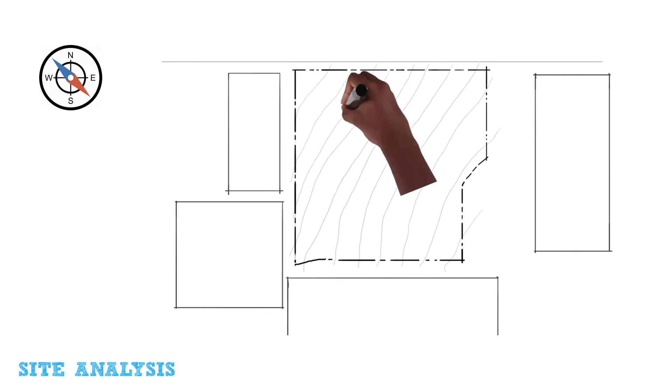Here are some important sustainable design strategies to consider when designing and constructing buildings. Do some site analysis. Gather context-specific information such as climatic data and other attributes of the site, such as the terrain, and design in response to them rather than against them.

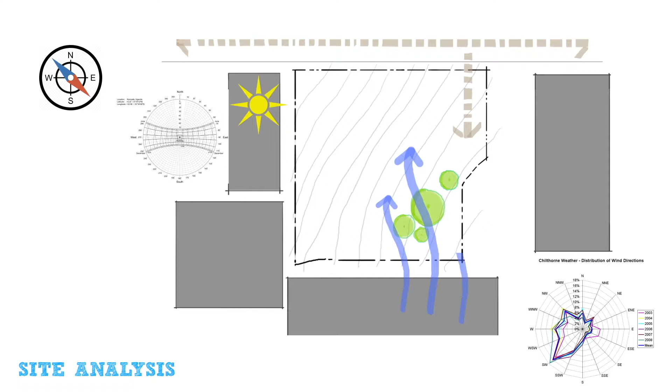Building less is always better. Retrofit old buildings and give preference to readapting greyfield and brownfield sites over undeveloped greenfields. This reduces demand on building materials and saves costs. The less the building footprint, the better. New buildings should not exceed 60% of the plot.

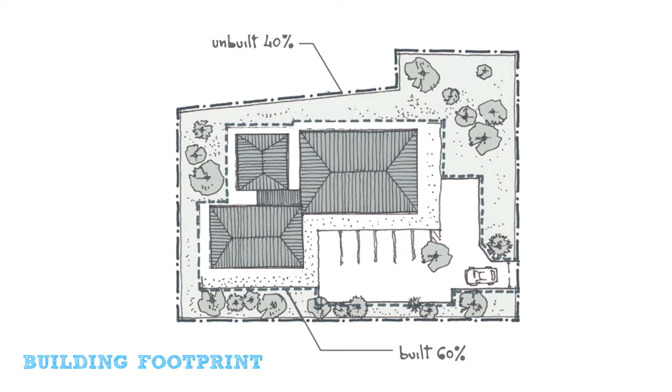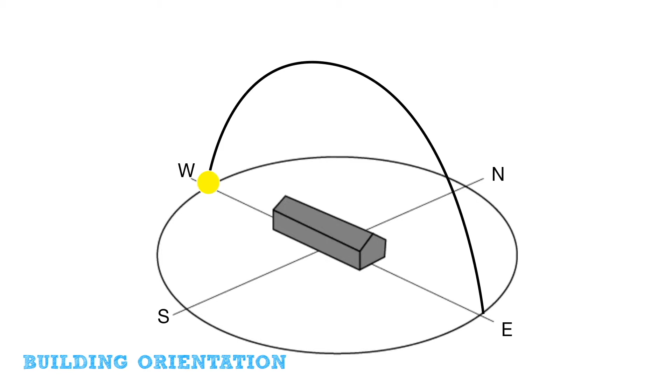Design buildings with the longer sides facing north or south. This minimizes exposure to direct solar radiation and heat gain from the sun, and saves energy that would otherwise be used to cool the building. Design buildings to be narrow in plan because they are easy to light and ventilate naturally, especially for hot and humid climates.

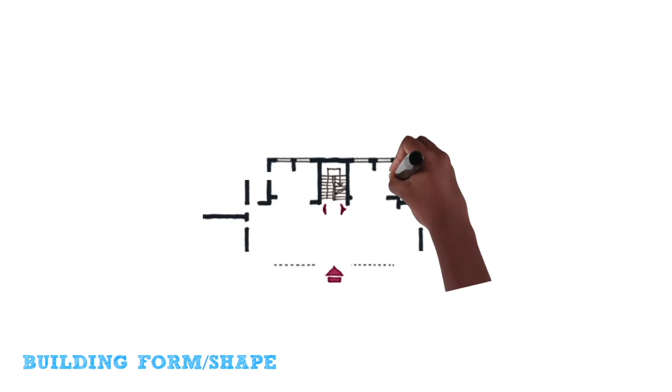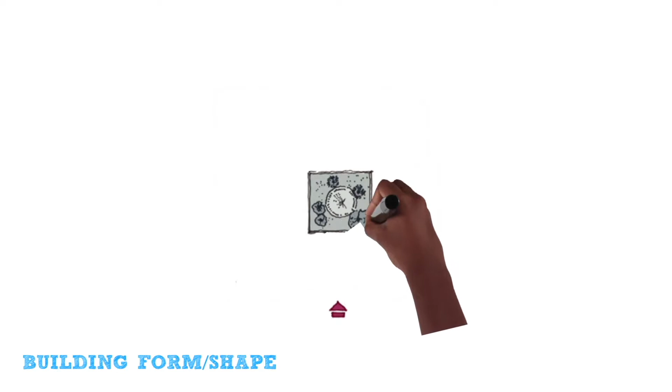For hot and arid climates, compact forms with internal courtyards are recommended to retain cool air in the building and minimize heat gain. Services such as toilets, staircases, lifts, and lobbies should be located on the east and west-facing facades to act as buffer zones and prevent heat gain.

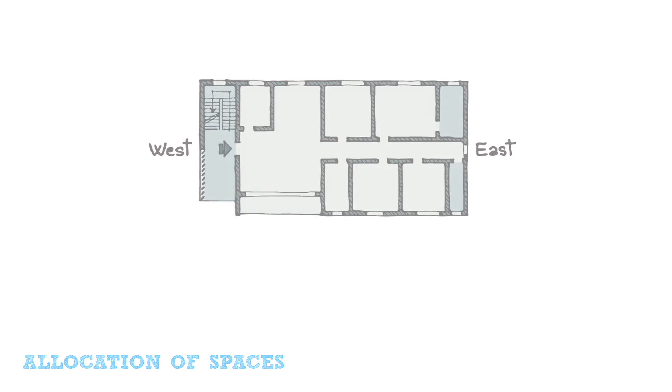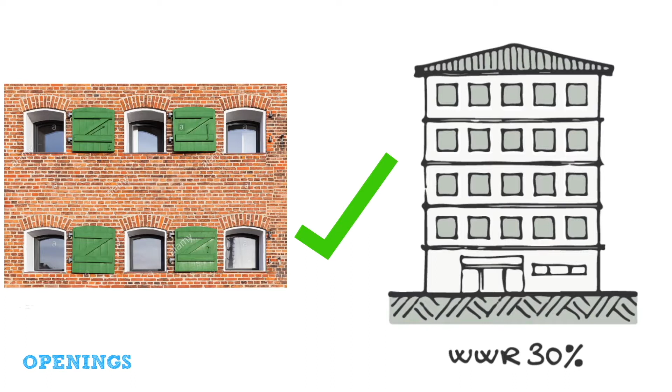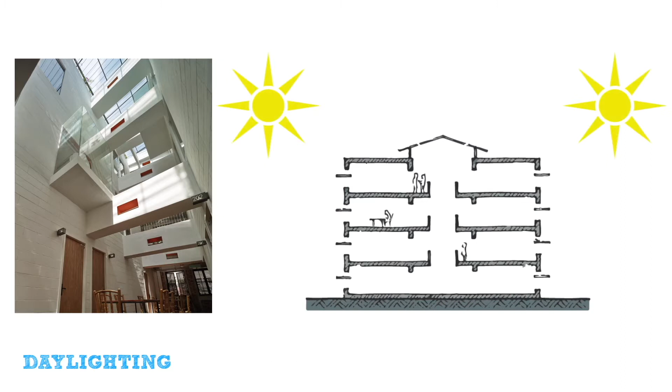The size of openings matters. The ratio of the size of the windows to the walls should not exceed 30%. This prevents unnecessary heat gain in buildings that will require energy to cool down. Maximize use of natural light. This reduces energy costs and improves overall well-being of building occupants. This can be done by use of clerestory windows and light shelves.

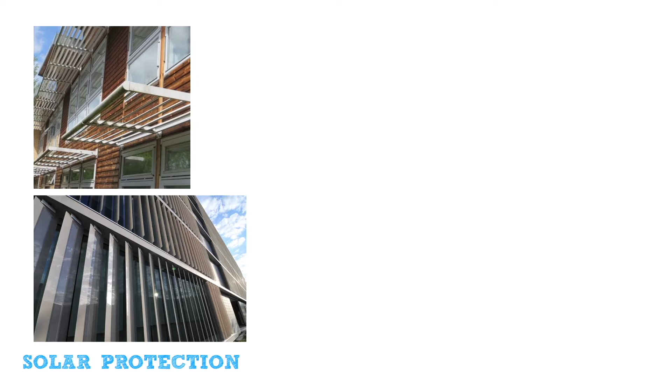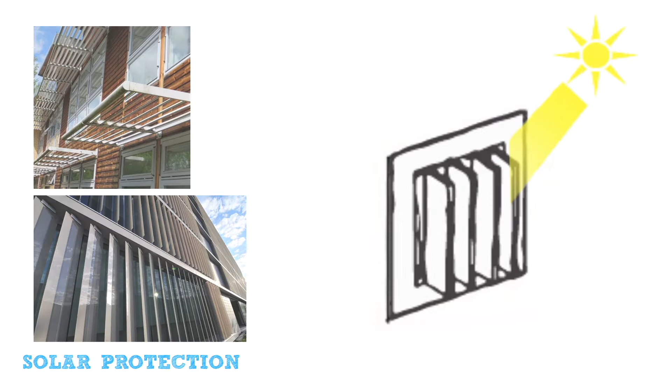Consider sun shading strategies such as deep roof overhangs, balconies, horizontal and vertical shading elements, screens, or green walls. These help to minimize direct solar penetration in buildings, improve indoor comfort, and save energy costs in the long run. Design for natural ventilation. Design for both cross and vertical ventilation by considering narrow buildings and providing roof vents, thermal chimneys, or clerestory windows.

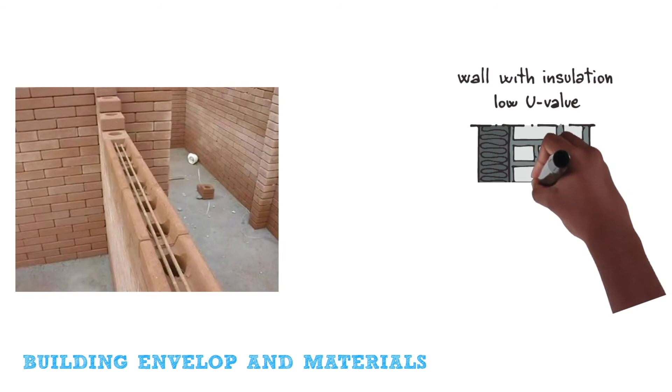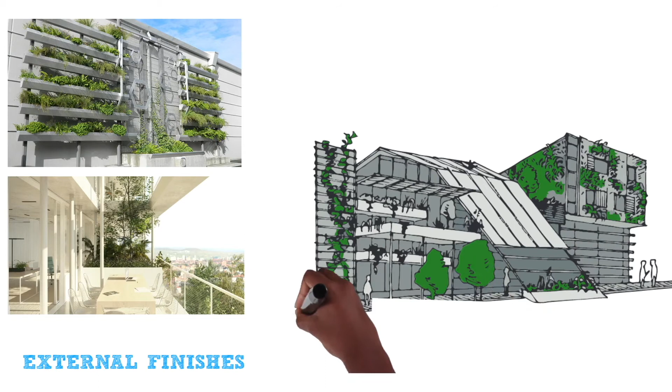Give preference to building materials that do not transmit unnecessary heat into the building. Also, always give preference to locally available building materials, and recycled materials are also recommended. Light-colored finishes are recommended on external faces to reflect excess solar radiation and on internal faces to increase internal reflection of natural light. Also consider green walls and vertical gardens that can help maintain cool microclimates.

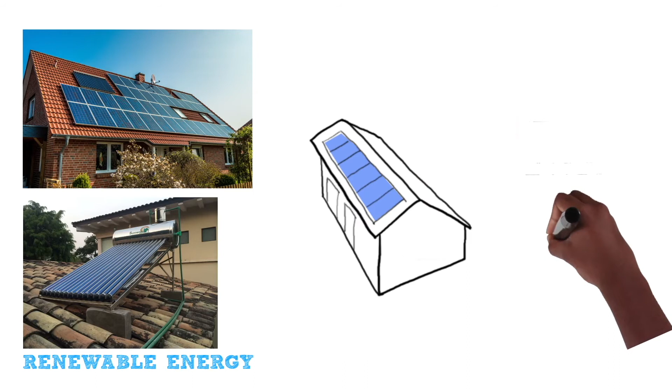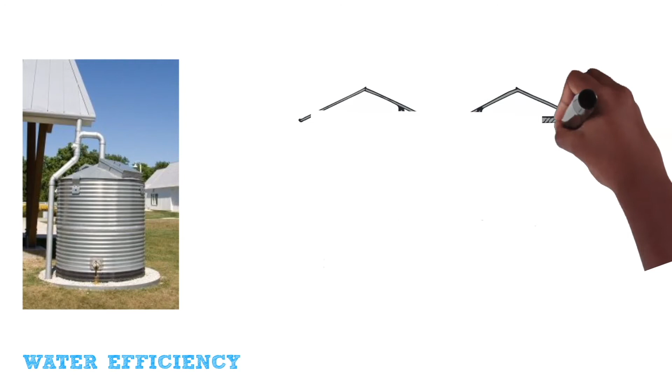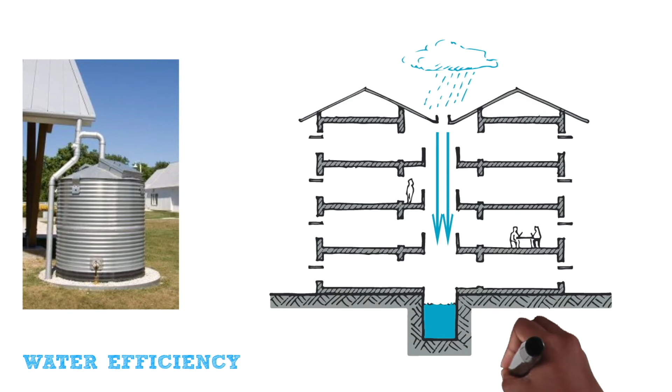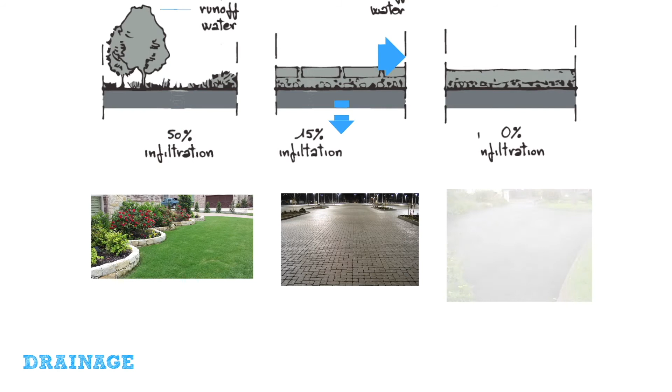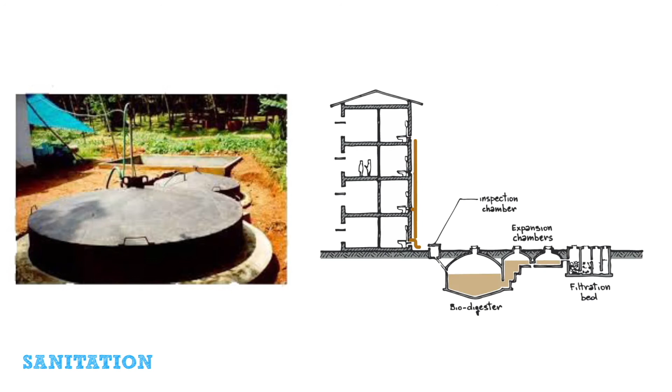Stormwater drainage is also important. Design paved areas to enable stormwater infiltration. This reduces runoff, flooding, and replenishes natural systems. In absence of a municipal sewage system, design for on-site waste treatment. This can be used to produce biogas that can provide extra energy for cooking and lighting. Provide on-site waste sorting facilities to ease waste collection and promote recycling.

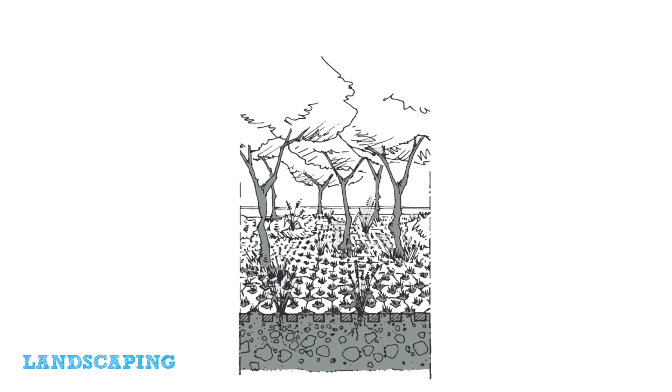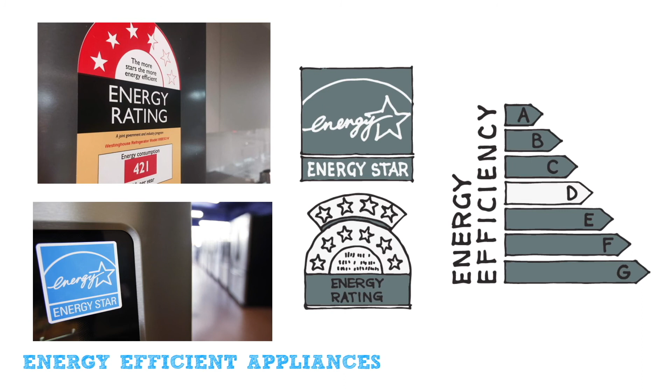Limit paved areas around buildings and design for soft landscaping to reduce heat island effects. Landscapes with native plants are recommended because they require minimum irrigation. Specify energy-saving appliances and mechanical equipment. Make use of energy-saving bulbs, light level sensors, motion sensors, and energy demand management. Also, encourage behavioral change to reduce unnecessary energy consumption.